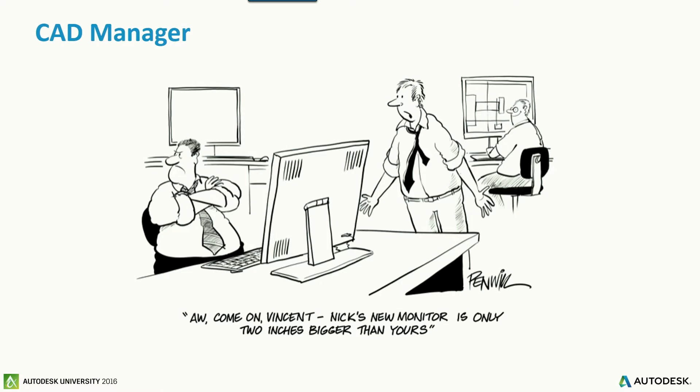So that being said, how many people in here are CAD managers? How many we got? I can't see too many. Well, not as many as I thought. So you CAD managers out there, Roger Penwill, if you ever read these cartoons of his, he gave me the rights to do this. The problem with this one is, I think I was Vincent in there complaining and not the CAD manager. So my second question, is this your dream job or was that your dream job? Oh boy, nobody said a word.

Wow. Well, anyway, most of the CAD managers that I know are engineers, scientists, technical specialists, people that have become very good and very passionate about what they do, that they're recognized by the company, and they say, you need to manage this process, because CAD management is a very difficult task. Not only do you need to manage the people, like in this slide up here, but this is not what this class is about. If you want to learn about the people part of the whole CAD managing process, Mark Kiker, Robert Green, look them up. They're very respected resources. That's where I've learned most of that part from.

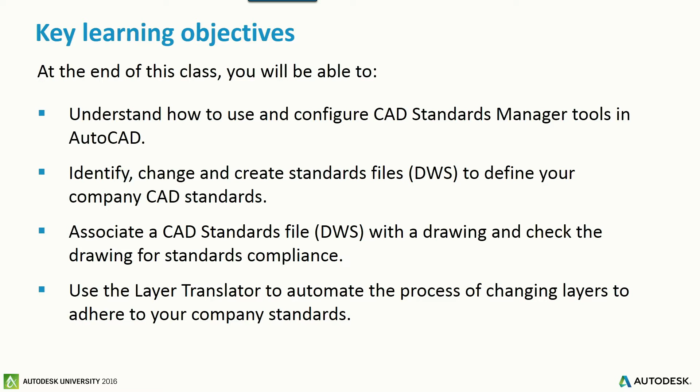And the reason I can say that is, all of these standard tools on here, my job is we audit my operators, right? We check their work periodically, quarterly. And they love it, you know. But I said, man, I can use this standards manager to save me the overhead time of checking the drawings.

And the only reason we do that, it's not to criticize, it's to give positive feedback to them so we can provide a uniform product and consistency. And I believe we're doing that. We all get busy at the end and things happen, but the tool you're going to see will enable us to do that. So the first thing, I'm going to flip over to AutoCAD. I'm going to show you where the CAD Standards Manager is on the ribbon, and then we're going to check out some of the tabs.

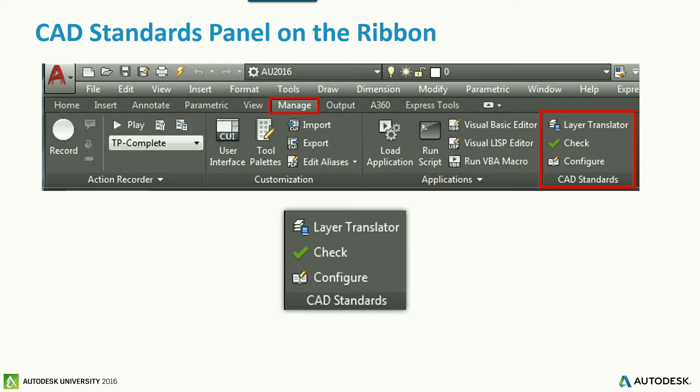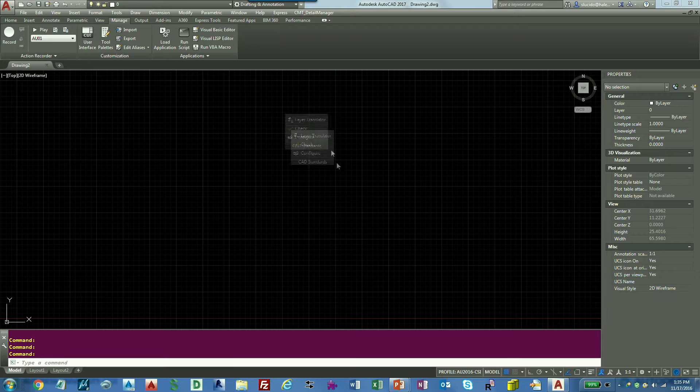So up here in AutoCAD, you see we have AutoCAD 2017, and I just have a CSI theme up here. So the Manage tab on the ribbon is located right here. What you see here is this panel on the ribbon. Not much there, huh? This has not changed. It's been around in AutoCAD for a while. It's just not used. If you're not familiar, I'm going to left click and just pull my panel out so you can see it.

What do we have here? We have the layer translator. If I select it, it has a box that tells you translate from, translate to. And we'll go through each of those individually. We have a check. Now this is going to come up and nothing's going to happen because I have not added a DWS file to this blank drawing. So I'm going to cancel.

And then here's where the configure part comes in. This is where we have these options. We don't have a whole lot to do. We have dimension styles, layers, line types, and text styles. Those are the things we can check. And basically, that's pretty much the fundamental root of what we're looking for. If those things are correct, you should be able to get a good output. So that being said, the first thing we're going to do,

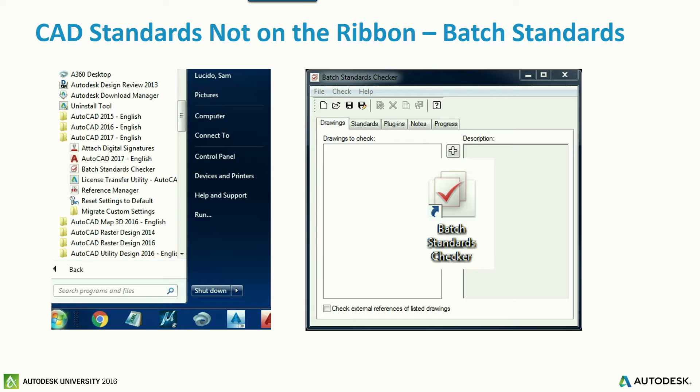CAD standards not on the ribbon. There's one more thing I wanted to cover in those 4 objectives in the beginning. There's something called the batch standards checker. We only have 60 minutes, but we're going to look at this because this one's pretty cool. This is not located on the ribbon. It's sort of like the reference manager. So if I go out to my desktop, you'll see I've loaded it here, and there it is. It's the batch standards checker, and you can load multiple files. And we'll go through this each time.

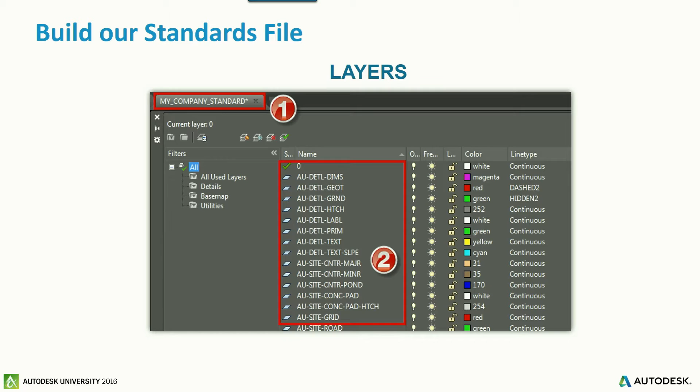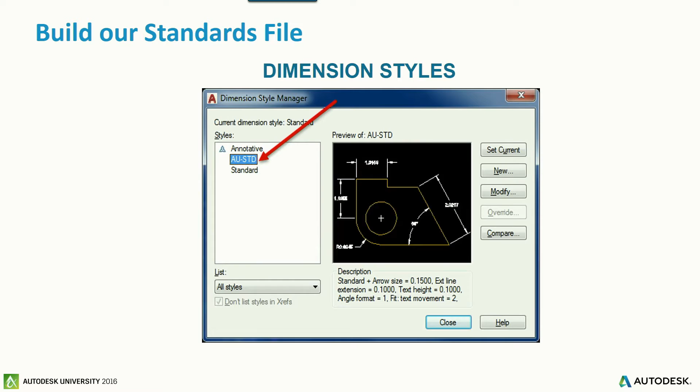So the first thing we're going to do is build different files. We're going to build one with layers, line types. You see I have some custom line types in there, so I want to check my drawing against these custom line types. Text styles, dimension styles. That's it. So the question you're probably asking is, why don't you just put them all in one file, Sam? Well, yes, you can do that. But for this exercise, we're going to do them separately and add them to one. The reason I wanted to go separate is because we can go one at a time.

And when I first started using the CAD Standards Manager, the main reason, it might be in one of the articles I wrote, was for text. I would get drawings that were converted from MicroStation or some other program, and it's like getting into your car when it's dirty. When you get into the drawing and you're zoomed into a spot, you don't even know where you're at, and then you look at the styles, and it shows 50 text styles that you don't know what they are.

So my goal was to use a program to merge the text styles. I used to use this text merge LISP file, and a couple other ones. And then I said, why can't I use the CAD Standards Manager? If I define my fonts or my company standard styles in a drawing, I can just fix them that way. So that's how it started, and then I started experimenting later with that.

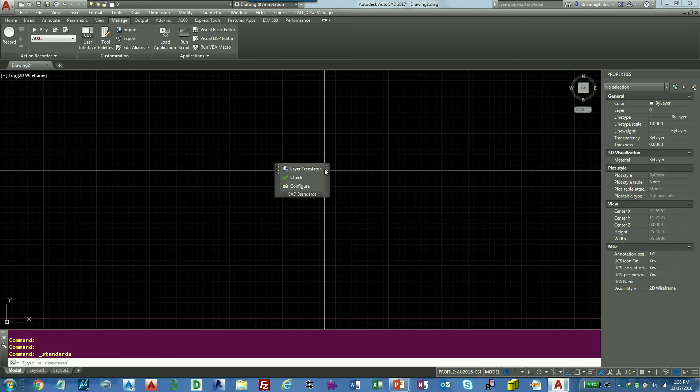So I'm going to flip over to AutoCAD, and the first thing we're going to do is create the standards file. I'm going to pull this back up on the ribbon, just like that. I'm going to my Home tab, and I'm going to open up a file called Standards. My Company Standards.

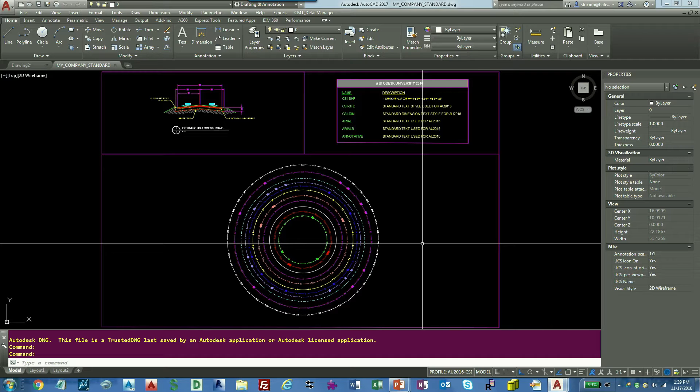So there's a file called My Company Standard. This would be if I wanted to take all of my text styles. I'll zoom in so you can see it a little bit better. So right over here, I have a detail with some dimensions.

If I type DDIM for dimension, I've got an AU standard for my dimension in there. These are all my standard font files if I type style - you can see these are all the fonts I'm using in the drawing. And then down here, line types - if I type LT for line type, I've got all these line types.

Okay, so that's cool. So next, what do I do with this? Well, I save it, obviously, but what do I save it to? So the first thing I'm going to do is save it to a DWG file like I did.

And then you have the option of saving it here to a DWS or a DWT. Now, the reason I wanted to cover the DWT - I save as a drawing file, then I go to the DWT, then I go to the DWS. It seems kind of one too many, right?

You can go right to the DWT, and the reason people use the DWT is if I actually go to save my drawing as a DWT. I'll do this one, file save as, and I'll just do a DWT and call it test.

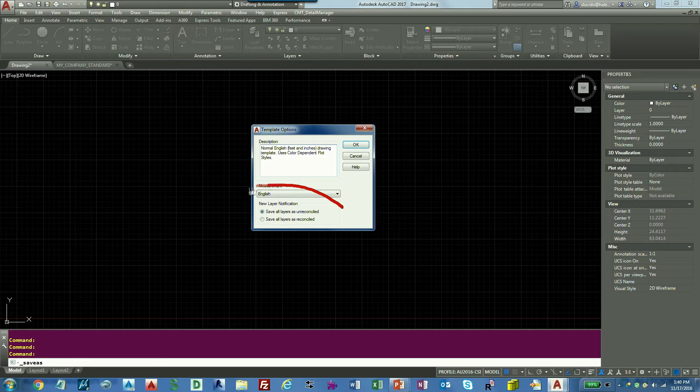You see what it gives me here? What it gives me is the option right here to save all the layers as reconciled. There's your advantage of your DWT.

And I'm sure all of you know - this is related to this, but not, it's a standard thing. So I'm going to cancel out of there and I'm just going to type my layer command. If you hit the gear over here on the left, there's a button here, new layer notification. If you don't turn that save, that reconcile layers thing, and you have this layer notification on, you're going to get a bunch of warnings all the time.

It's pretty annoying. Now, is that overkill? I don't know. We turn that off, so I don't worry too much about it, but I wanted to make sure you are aware that that's out there.

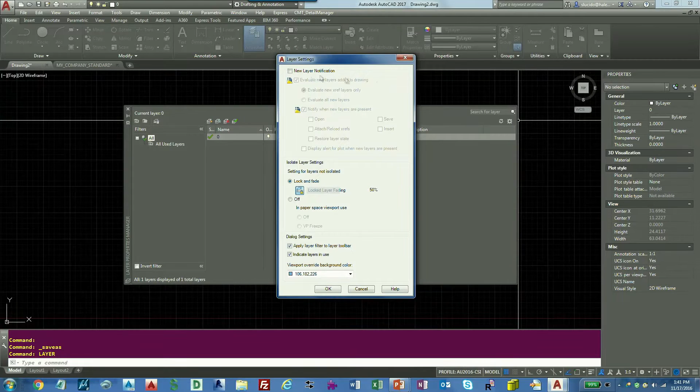So that's basically that. So I have my company standard. I saved it to DWT. I reconciled the layers, and then I saved it to a DWS file, which is right here.

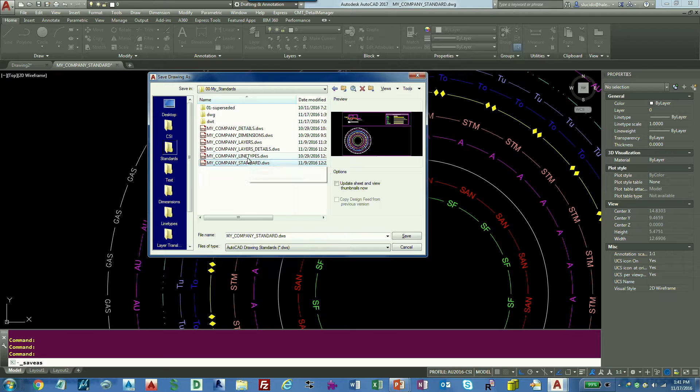And I'll go under standards, and you see what I did - I have my company standard right here. And then I have my company line types, my company layers, details, dimensions. I'll show you those files really quick, and then we'll do a check on text.

So the first one is, if I go into my standards files, the text is just contained in the company standard. So if I went into dimensions, I'll show you - you see how I changed, what I did was I changed the extension lines, the colors. I just made it a different dimension style so you could see what it does when it brings it in.

And a lot of you - I'm a civil guy, we don't use dimensions too much in what we do. Civil 3D takes care of a lot of that. But you architectural people and mechanical have many different dimension styles. This is where this can help you at.

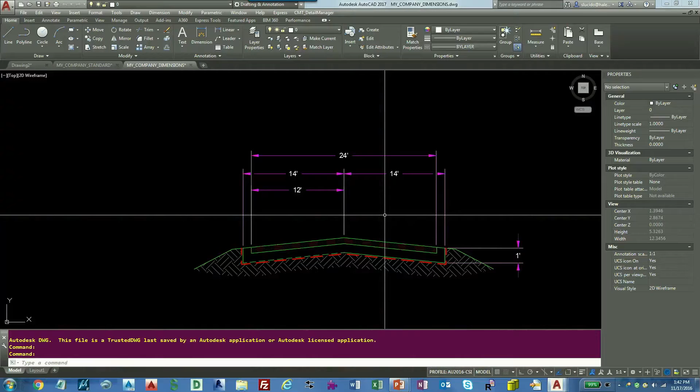So you take your dimension style, create it in any drawing - it can be in any drawing or it can be another one - and save it as the DWT or DWG and then the DWS. I'm going to open up another drawing to show you.

Line types you saw in the other one, but this is a separate one, line types, and I've got all my line types in there. You see this one is like two diamonds in it, where I love line types. If you followed me over the years, you can create a lot of different things with line types.

That uses the Wingdings font, and you just type in the letter that creates the diamond. So that's part of our standard. We use that, so I want to make sure we check against that on our drawings.

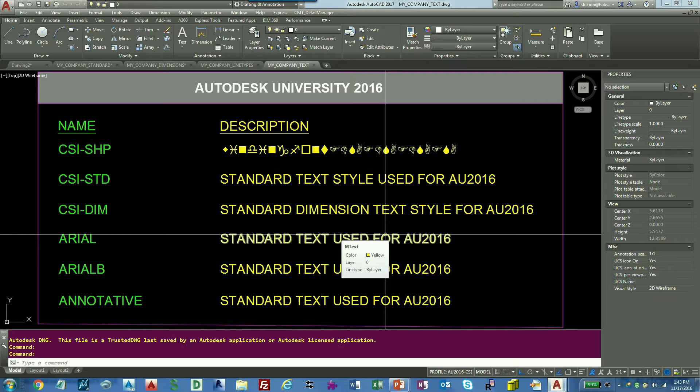I'm going to open up another drawing, the text one, and there's our standard text files. So basically what I did was I went through my layers, my line types, my text, and my dimension styles, everything I had in my company that I think was a standard, and I put them into files. Putting them separate helped me keep it organized, because a lot of times I would just want to check for it and it became cumbersome. But then again, putting them all in one place is a good thing too, so it's your preference.

I'm not going to save anything, and we'll see where we're at on my PowerPoint.

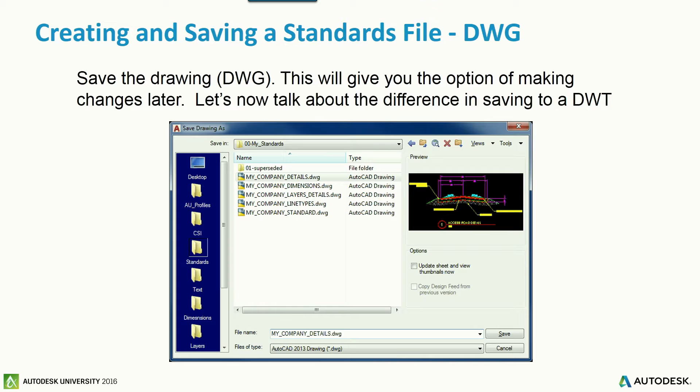Now my PowerPoint, just so you know, my good friend Matt Murphy always told me, years ago I did a class on line types and I made the best PowerPoint. I was so proud of it. But my PowerPoint's not for you, it's for me to keep track of my time. That's all it is. I'd rather show you live in the program how to do things. It has the images and everything we need, but it's there just to keep me on track. So we saved it to a DWG, and then I told you the difference between the DWT.

So just keep this in mind. I sort of still do the DWG and then the DWT and then the standard, just because I like the DWT since I can give it a description too and tell it version whatever.

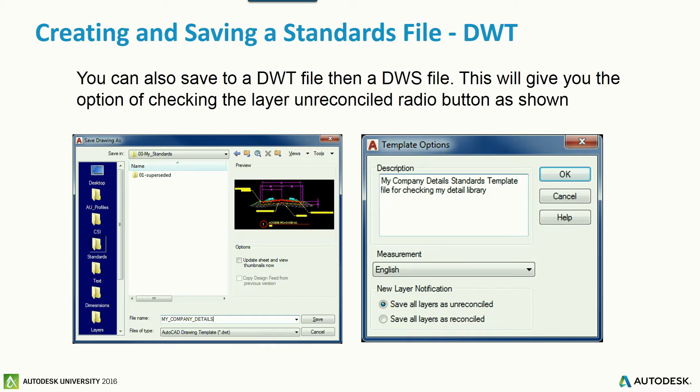So now that we've got all our CAD standards in place, we want to load up the drawing file into our thing. So we saved our DWS file. So now what we're going to do is I'll just briefly show you.

We're going to check a drawing for the text plugin. And like I said, this was the first thing I did, and when it worked, I was so happy to show people. And I said, you can do this, it's easy, this is simple, it's very simple to do. So we're going to do text files, add it into our drawing, and check a new one.

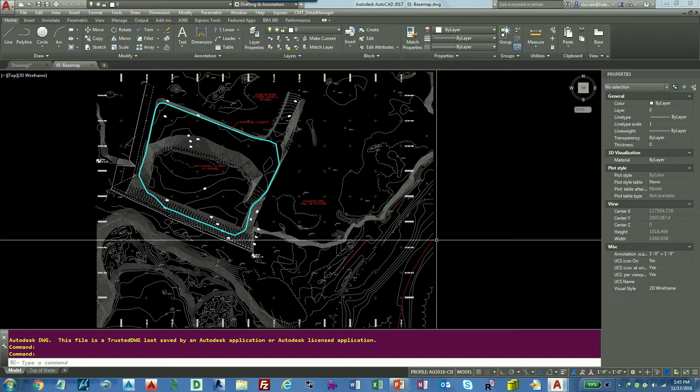So I'm back in AutoCAD. I received the base map from the client. Like I said, I'm a civil guy, but that doesn't really matter. Nifty site plan, topo, some text styles in there. I type style at the command prompt. And look at that: Arial, dim Arial, F1, standard, working, so on and so forth.

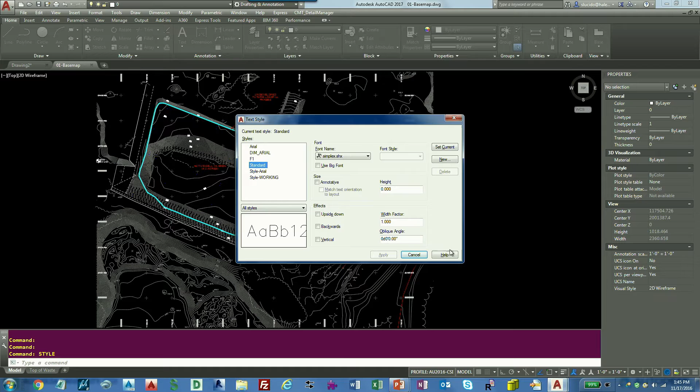Not what I want to see. Remember our standards were that CSI, SHP standard. We had them set in our other drawing. So how do we fix this quickly? We made that DWS file, my company standard.

I'm going to go over to the Manage tab on the ribbon again. I'm going to go to Configure. I'm going to add that DWS file, this one is my company standard. So I added it, do you see how it added it in there?

There's a settings button in here you have to look at as well, which will give you an alert once you add this in there if someone violates the standard or if the standard file is not found. So the settings can be checked there. I usually display an alert upon a violation, and over here you can set it to none or your company standard file. So I'm just going to hit OK.

Plugins, I'm only going to check for text styles. So I'm going to uncheck everything, and then I'm going to hit Check Standards.

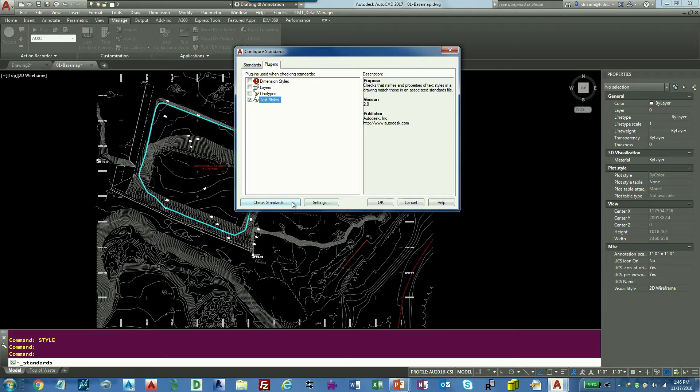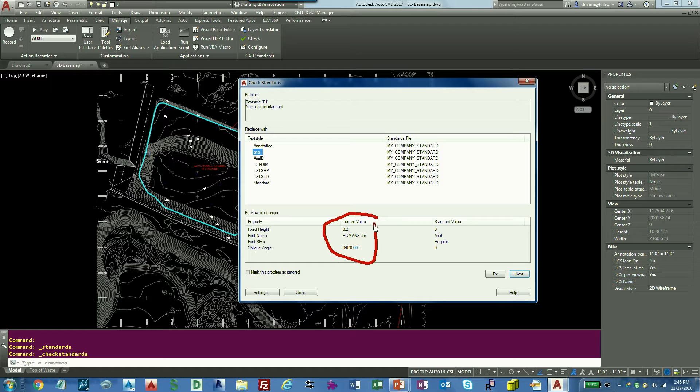And what AutoCAD's going to do, let me pull this up a little bit. You'll see it coming up there and it says, I've got this text style called F1, it's not part of what you're showing me down here, what do you want to change it to? And I said, okay, well, maybe I'll change it to Arial. And you see what happens is the standards manager is going to say, okay, the current value is a Romans 0.2 and your new value is a 0 height of Arial.

I'm just going to go through and fix it. The next one is Arial, I'm going to pick Fix. The next one is Style Working, Fix. You'll have to kind of look at the font and see what it is, see what it represents, because a lot of people don't really name all these, especially when you get them from somebody else.

Dimension Arial, we have a CSI dimension. We're going to fix it. And it says, I fixed 4 problems found, fixed automatically 0, fixed manually.

You can set this to fix everything automatically, but if you're anything like me, I want to see what I'm fixing. I just don't want it to go fix it and not tell me what's going on.

So I'm going to hit Close, Close. I'm going to type Style at the command prompt, and you see all that stuff's gone. Just like that, you cleaned up your text styles.

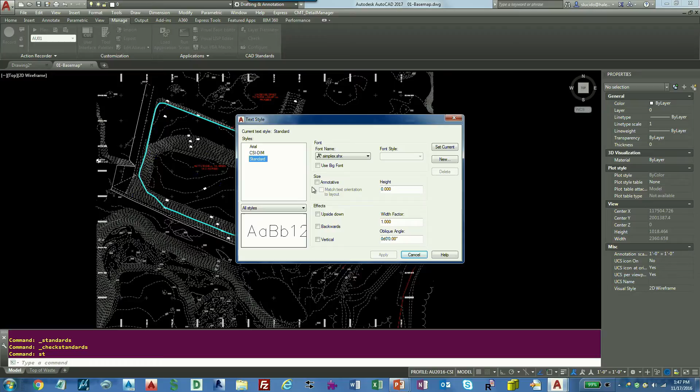That was, 2 minutes? So that's the text part of this. And like I said, it's pretty basic, but for me, I fought with that for years in drawings. I loaded up this merge file, and we had drawings that would come from DGN styles. We couldn't get rid of them. This gets rid of things.

So that takes care of text. I'm going to get out of my base map file, and I'm going to bring up my dimensions.

So we hired this young person, an intern, and we said we have 15 details to do for our library. Why don't you do these details all week? So he comes in, he does the details, and look at the dimensions. If you look at them, we've got tick marks, we've got italicized fonts, they're all red.

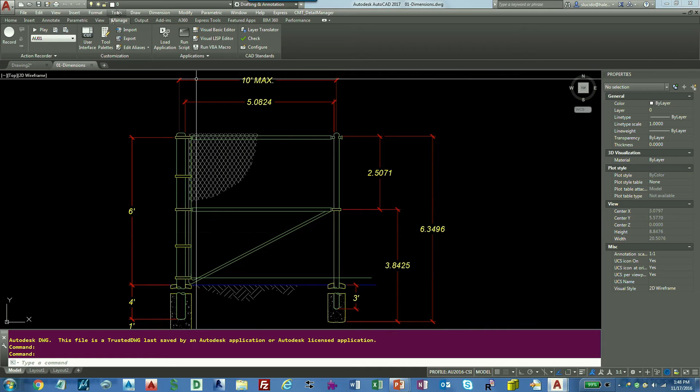Remember the dimension one I showed you? We'll go back and look at it again. If I go under my standards and under my drawing, I'll just bring it up. That's our standard dimension. Now it's probably not what you would do, but I wanted to make it visually representative. So that's what we saved our dimension style as, opposed to this. It's pretty different. So let me get out of there.

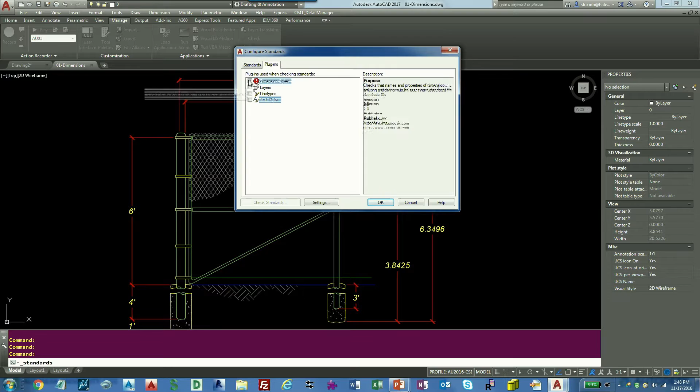Same concept. CAD Standard, the panel on the ribbon. I'm going to go to Configure. There's one in there, my company dimensions. I must have it in there. I don't want text styles, I want dimension styles. So I'm going to pull this over so you can see what's going on here. And I'm going to go to Check.

And it's going to say someone created a dimension style, and you CAD managers out there, this happens. My own standard, Jim's standard, Bob's standard, whatever. That happens a lot. People like to use their name. They're proud of it. So that's fine, but it's not our company standard. So I'm going to change that to AU standard.

And notice down below, these are all the values that are going to be changed in the CAD Standards Manager. One thing I want to point to, so we'll go into settings again. It's the same warnings again.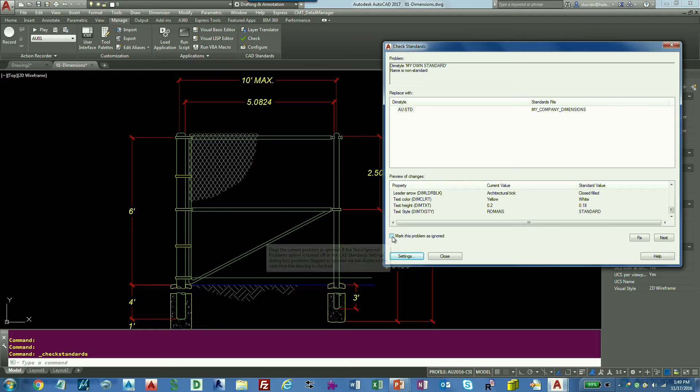Down here, there's a button that says Mark as Ignored. A lot of times you get drawings and files from clients that you have to do their way. The client trumps your standards, right? But in my world, it does. So that's when the CAD manager, whoever's doing that, you can mark it as ignored, and then when you run the check, it'll say ignored by S. Lucido, or whatever your login name is.

So let me go back here, and we're just going to say yeah, I want to fix that. And it's going to say one fixed automatically, and hit close. See what happened? It happened pretty quick, but that's pretty cool, isn't it? Everything changed on the fly like that.

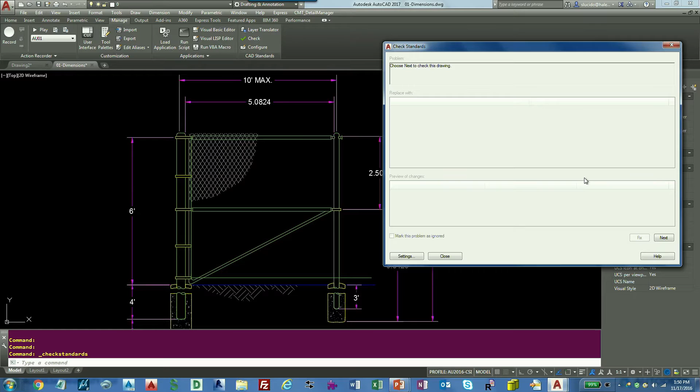So if you have multiple dimension styles, we fixed dimension styles and we fixed text styles. I'm going to close this, close my dimensions. I'm going to hit no.

So next up is line types.

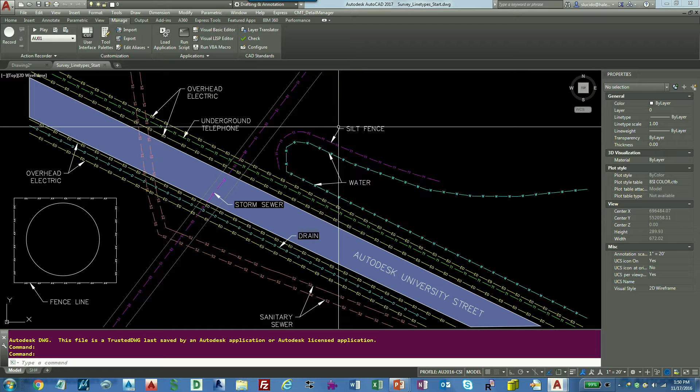Okay, so we had that standard line type file that we used, all these line types, and this is just a base map I created, just made it up. And I have all these different cool line types in there. But I noticed when I had the line type file, when I zoomed in, I said, man, my fence does not have 1x. It has 2 for the fence.

S2 is under my properties, you can see. It looks like it's a sanitary sewer. S1 is a storm sewer. And you remember our standards were SAN, STM, and the 1x for the fence.

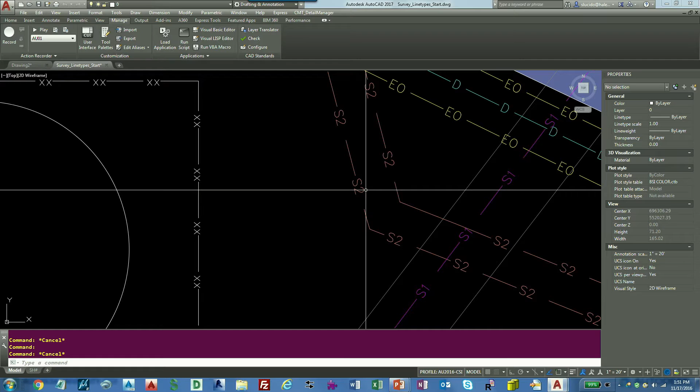So we can fix this the same, doing the same concept. We're going to configure the standards first, add the line types plugin, that one in there, and then check against the line types. I'm going to bring you up a quick one for this one.

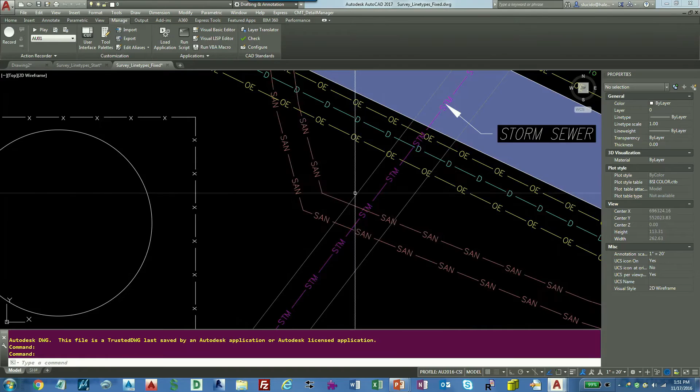I'm not actually going to go through each line type one by one and show you what it did. So after running the check, it changed my line types to sanitary, storm, drain, and water. So there's two fixed lines. So text, dimensions, line types. So what else? That's pretty much it, right?

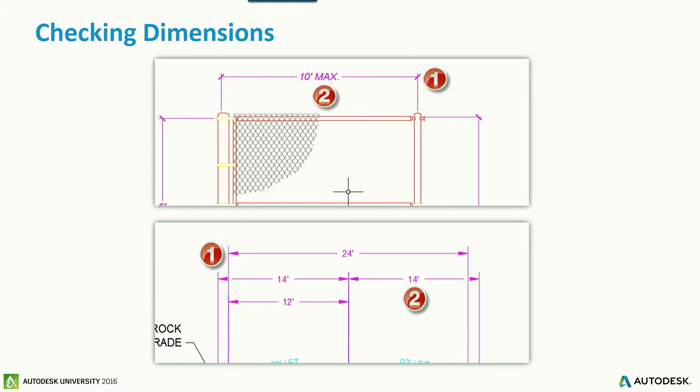Okay, let's go into the layer translator. Those are our basic things. There's layers in there too, but those are our basic concepts for this. So I'm going to go back out to the PowerPoint. We'll see where we're at. So we fixed our company dimensions. You see, those are the ones that were the wrong ones, and we just fixed them through there. We went back out. We did the same thing with this survey map for line types.

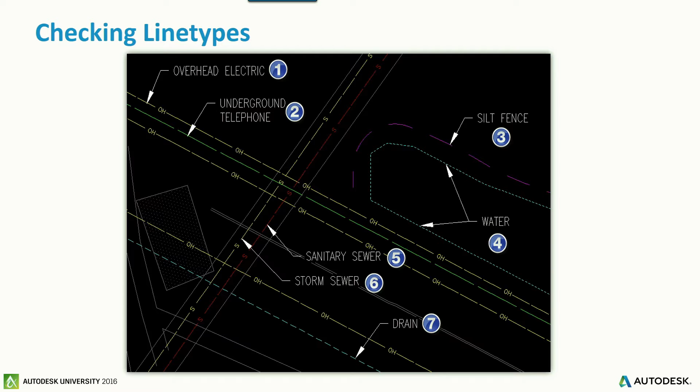And the reason I didn't go over line types too hard is because the layer translator can do that too. So you can save a step by going through there. But it's a good way to fix line types, especially DGN line types that come in there. It'll fix them and remove that SHX warning. So the layer translator. So what is the layer translator? This is a pretty cool program. Basically what you do is you bring up your drawing, that's the non-standard. You bring up the drawing that is your standard, and you map things.

So we're going to go back out to AutoCAD again. Let me get out of my line types. Layer translator. Our detail person created this detail from our library, and they put everything on these layers that really doesn't look too correct to me. So we know that a few things are off. So let's open up our detail, the one that was our standard. Now remember, I created a standard file called details. And the reason I did that is because detail standards sometimes are different than an actual overall drawing standard depending on where you work. So I wanted to show you.

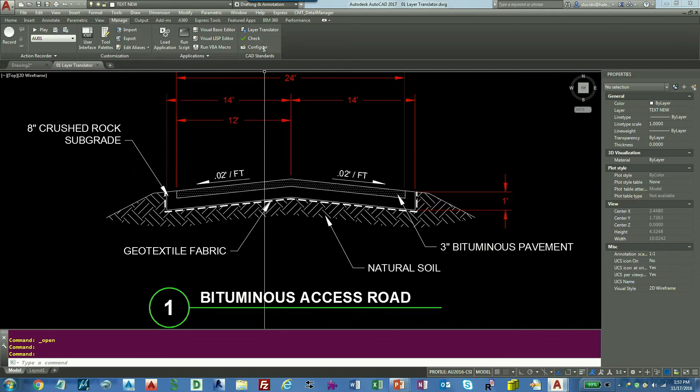So there's our access road, our standard access road, the way it's supposed to look. And here's the one the intern drew. So what are we going to do? Let's use the layer translator to fix that. I already saved this detail drawing as a DWS file, right? So I'm going to get out of there, and I'm going to say layer translator. So notice the first thing that happens is it comes up and it says, here's all the layers in your drawing. And if you get the little broom in here, that means you can purge it. Translate to what? Well, what do we want to translate to? Let's bring up my standard file.

Oh, it might show up when we do another exercise. I'll show you. If there's a little broom here next to it, you can right-click. The question was, what did I say about purging? If there's a little broom next to the layer, it means that it's not used in the current drawing. You can right-click and purge it there. Otherwise, it's going to remain in the drawing until you do purge it. So I'm going to load my standards file.

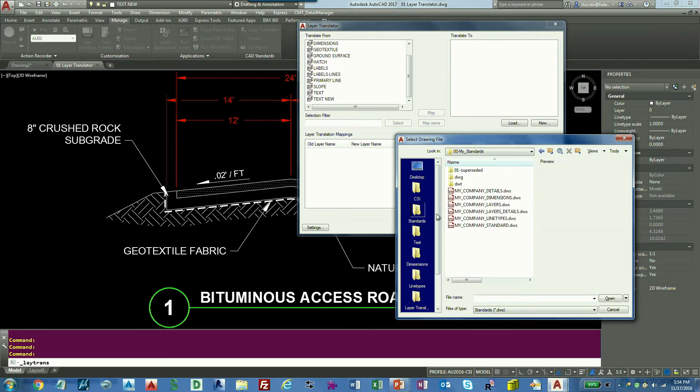Okay. So basically, this is how you do it. So the settings, I wanted to show you one thing on the settings. If you go down in here, this is where you have to set up the layer translator to actually translate what you want. Force the object color to by layer. Force the line type to by layer. Remember I told you about the line type thing? You can do it in here, so you don't necessarily have to go out and do it the other way. Force transparency and translate the objects in blocks. I don't typically write a transaction log. It's just a log file. And then the show layer contents when selected.

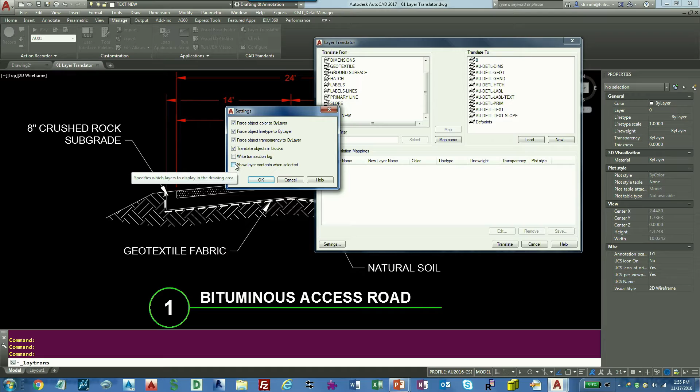So the reason I don't do that, everybody knows what the layer walk command is, right? How you walk through layers. If you check that button on, when I select map one to the other, it's going to kind of walk you through the layers one by one. If I don't check it like I'm doing now, I'm just going to map the layers. So I'm going to hit OK.

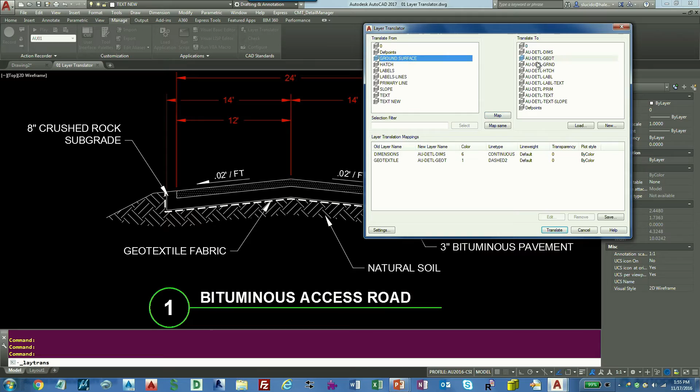So I'm going to just do this. All it does, I'm going to select dimensions on the left, and I'm going to select this on the right and hit map. And you'll see dimensions here, AU detail dimensions, continuous line type. Geotextile, I know that's on a geotextile, map. Ground surface, map. Hatch, map. Labels, map. Label lines.

It might have been that one. Primary line, map, slope, map, and then we have 2 text lines. I can actually hit my control key and hit text for both of them if I wanted to. Map, and def points, obviously, we can map it anyway just to get it to 0. Map. Okay. So I've mapped everything. Now what do I do?

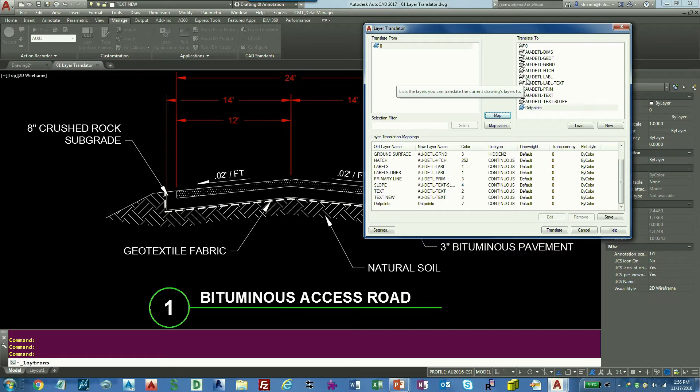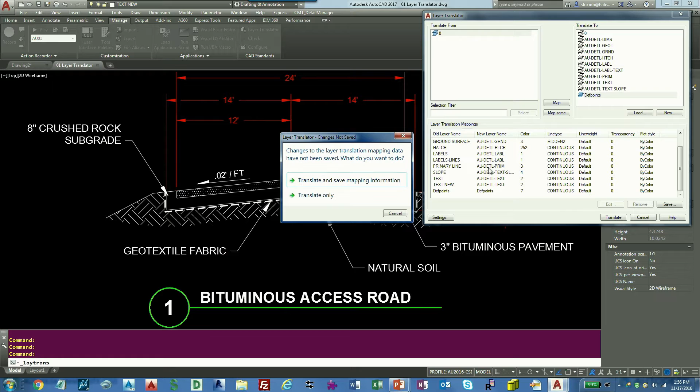I translate it. So watch my detail when this happens. Remember what the other one looked like. Translate. Okay. It says, do you want to save the mapping file? In this instance, I don't. And I'll show you in the next exercise how we're going to save the mapping file. The reason being is the layers that were on this detail probably won't be on another one, so there's no reason for me to actually save a file to redo the layer translator. So I'm going to translate only.

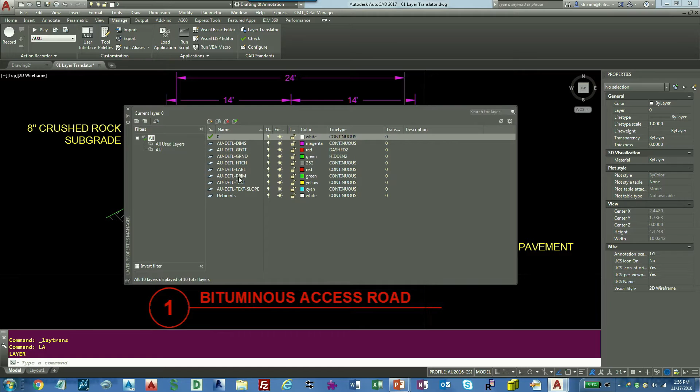See what happened? There's our detail right there. Everything translated to what we wanted in our drawing. It looks exactly the way we want it. The line types are hidden. The geotextile's there. The layers are good. So that's the layer translate. That's a pretty basic example of how to use that, but I encourage you to take a look at it. Now, the next example I'm going to show you is what I believe is the key to using this.

So I'm going to get out of my translator, and I'm going to go back to my PowerPoint and see where we're at. So we went through the layer translator, and we went through the settings. Remember, we said force object. Just remember that last one is sort of like a layer walk. I didn't really do that. Your group has to be disciplined enough that everything's drawn by layer, which is challenging at times, because if it's not drawn by layer, this is not going to work. And then we translated the drawing. So now I want to show you, remember what came up and said, do you want to save the mapping file? This is where the key comes into this.

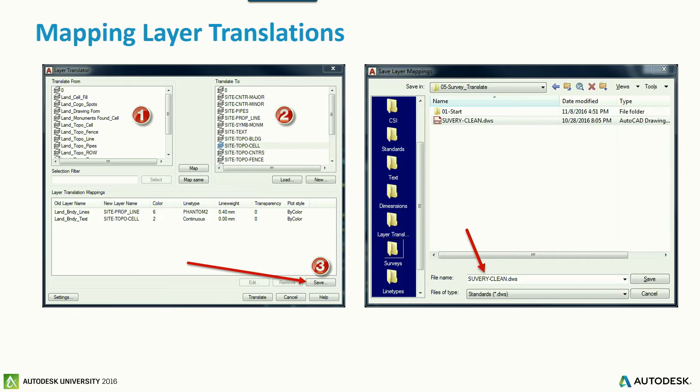So I have a contractor. So I'm going to bring up a drawing. So I have a contractor that we use, and he does, see, ignore SHX fonts. He does property surveys for us. Great guy. We love the guy, right? But his surveys come in and they're not very good. But cost effective, friend of somebody, we like them. We use them all the time. We use the same surveyor to do drawings for all these properties in certain areas. The same surveyor gives us his same layer settings every single time. So this is where the key comes into mapping.

So what I did was, I said, okay, I got my first drawing from this surveyor. They're going to send us 10 more. Or the same surveyor is going to send us updates to the base map every 3 months. Those are the cases you use it. So now I'm going to actually configure this. I'm going to add a drawing in here. I have to test it in here, use the layer translator, and then map the settings. Actually, I'm going to cancel out of there. I'm going to go back in here and configure again. Layer translator. I'm going to load the drawing file back in my layer translator, my surveys.

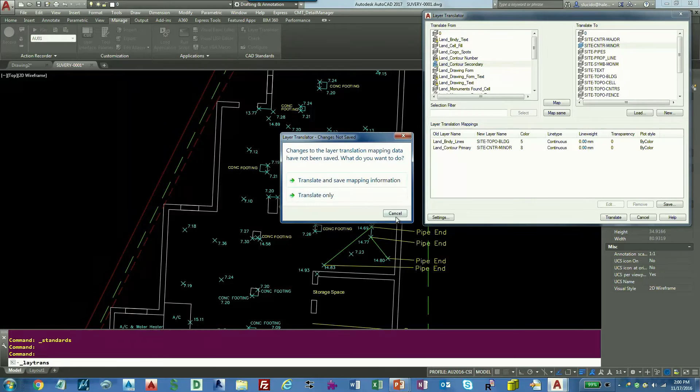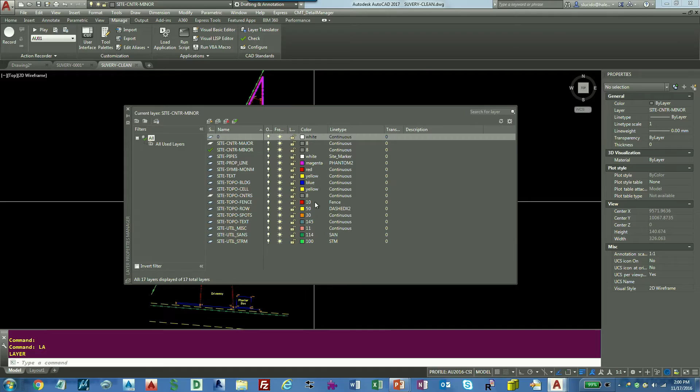I'm just going to show you what the layers are in these. So here's the survey. Here's what his layers are. They start with land, and then the one we cleaned up starts with site topo, and it changes a few line types. Okay, so we think we're ahead of the game, right? This one I actually used on projects. It actually works. So I saved my mapping file and I called it survey clean. So I took that, saved it to a DWS file. So we've got this guy, he just sent us another drawing. He sent us 2 more. So we're going to open up the second one.

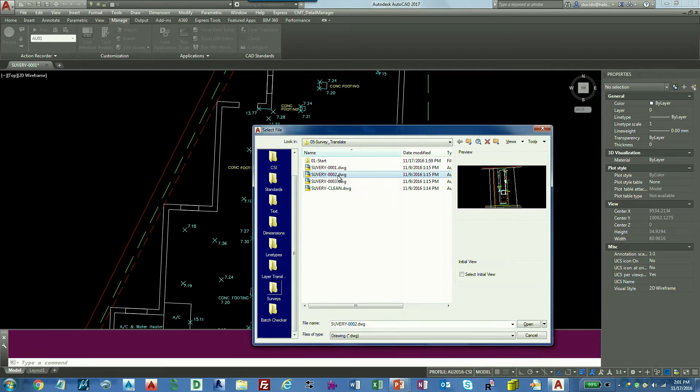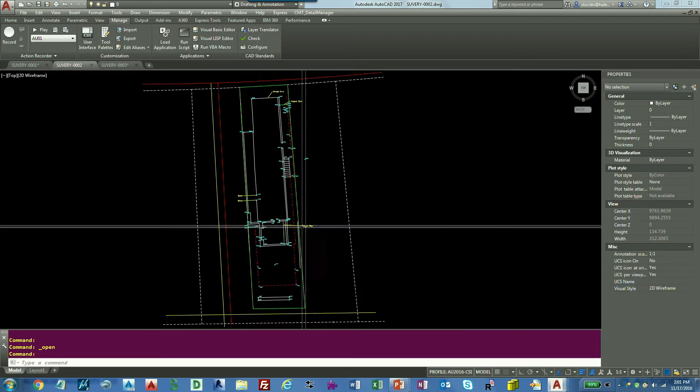I'm going to ignore the SHX, it's probably a line type. And then I'm going to open up the third one. So if you look at them, and like I said, if you look at the layers and do the layer walk command, you can see we've got a couple different land, topo, fence. Layers are pretty similar, right? Kind of looks the same. So we know we mapped that file.

So now what we want to do is take these 3 drawings and convert them. So how many people, when you get a survey, and I manage a lot of CAD people, I've done this for years, it's going to take me 4 to 8 hours to clean that up. It happens, right? It happens. Clean it up, make it look good to your standards, make sure it plots.

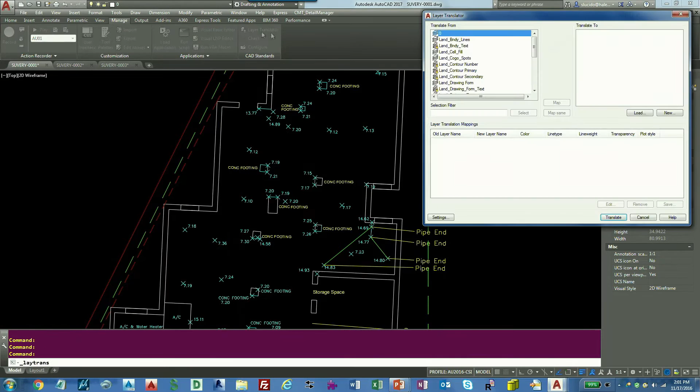So I'm going to go into here. I'm going to go to the layer translator. And I'm going to load the settings here. I'm going to go to DWS. So I saved it to survey clean, right? Okay, I'm going to do 1, 2, 3. Open. See what happened? Everything from my left side went to the right side because it's the same surveyor with the same layer translating. And I mapped it to that DWS file.

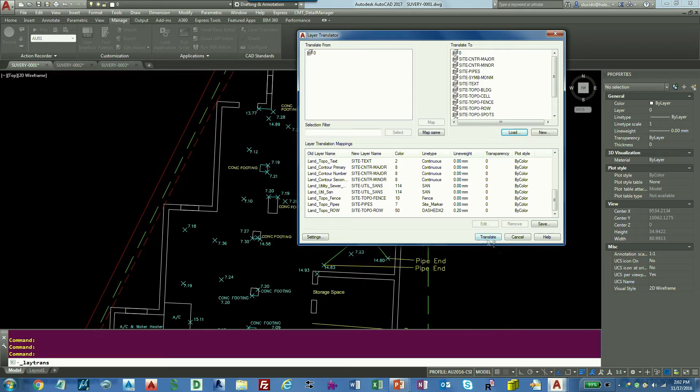I'm going to hit translate, watch my file. I'm not going to save the mapping file again, translate. Look at my file. That's number 1. Survey number 2, layer translator, load, survey clean, translate only, looks pretty good. Survey 3, layer translator, load, survey clean, translate only.

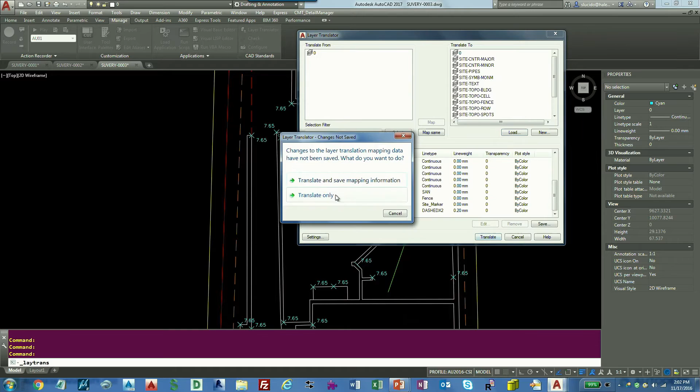This is when my good friend Michael Beal goes like this and does touchdown. Isn't that cool? I mean, you can really think about what you can do with that. I took 3 drawings that came from somebody that uses the same layer scheme. In a perfect world, you give them your layer scheme and they send it back to you, but that doesn't happen. At least it doesn't happen with me.

But if you use the same surveyor on projects, which a lot of times isn't up to you, it's up to the project manager or the client, you set up these files and you can translate. It works well for me when we get base map updates for surveys for land development projects. And then we can create these mapping files. You just keep it in a folder called standards and you're good to go.

Man, you guys weren't as excited about that as me. That was my...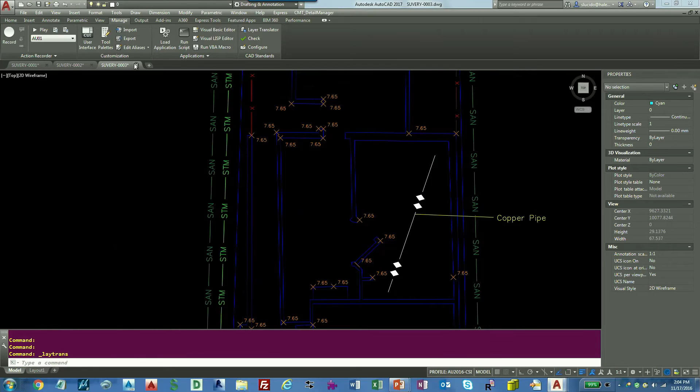Yeah. Anyway, let's go out and see where we're at on the PowerPoint. So mapping the layer translation. So that does that. Making a new layer. I threw this in there because I wanted to say if you do have a standards file connected to your drawing and somebody tries to make a new layer, you're going to get a warning that says, hey, you can't do that. Or do you want to have it on something in there? So if I actually opened up a drawing, I'll get out of my translates. I'm going to open up one called layers.

So I have a standard file attached to this. Say it's my company standards. And the plugins are set to layers. And it's attached to this drawing, and I saved it as test. Okay, and if I go to layer, if I try to make a new layer, see what it says? It says it's not part of it. I can choose a layer that's existing on there.

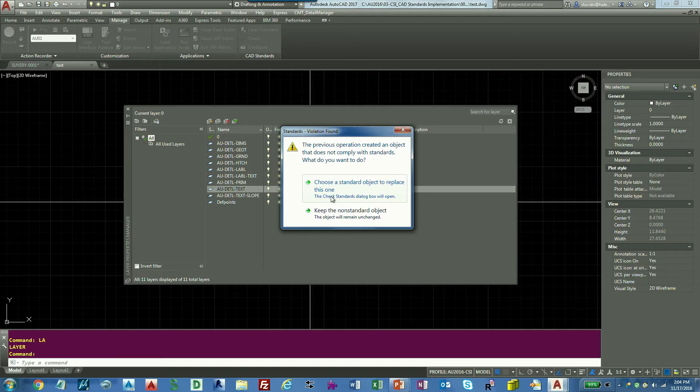This would be if you had layer settings where you had every single layer in your company all set. You could set it to this file, attach that CAD standards to that file, and then the operator would know, hey, look, you can't do that. I always wanted it to do, though, like a wildcard, to kind of reference, so if your layers were prefaced by something. But that's what I mean by layer in there. And that's controlled by adding the plugin to it. And I can tell you honestly, a lot of times when I configure these, so I've got that set there, when I get done, I remove it.

And this is at the end of the PowerPoint because there's a system variable called standards violation. And if you set it to 2, what I noticed, I have about 12 to 15 core users. They know what that means. But I also have 80 other users that when they get the little bubble that pops up on the lower right that says standards file missing, they think there's something wrong with the file. There's nothing wrong with the file. It's just that you checked it against some DWS file that's not located on their system.

So it's called standards violation. It's either 1 or 0. If you set it to 0, it'll turn that notification off. Even if that file's not in there and it doesn't see it, they won't get a warning. So we made a new layer.

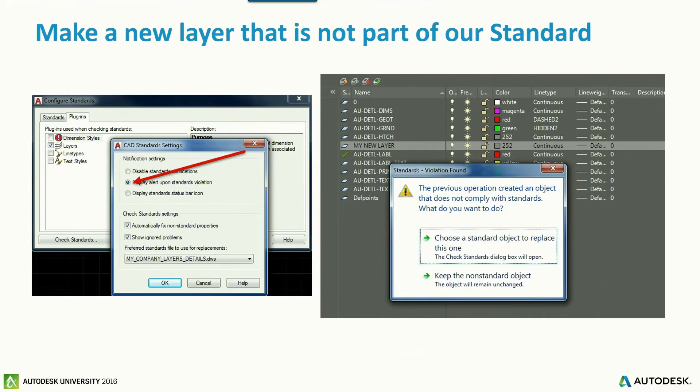Batch standards checker. So back to details again. So like I said, I audit drawings for my team, and we have a detail library. So when people get light on work, I'll give somebody a pool of erosion control, a pool of road access, and they'll do a bunch of drawings. So how do you check them? So this little tool is located outside of AutoCAD. And these are the icons that are showing up there. In the first one, new, open, save, save as, start, check, stop, and so on and so forth. And I'll show you how to do that.

So I'm actually not in AutoCAD. I'm going to actually go out to my desktop. Let's just get out of AutoCAD completely. So we don't actually have to be in the program to use this standards checker. And if you want to know where it's located, you see I have the reference manager here. If I double click it, there's a reference manager. And if I double click the batch standards checker, the batch standards checker comes up there as well. So both of them are located under Start, under Programs, under Autodesk, AutoCAD 2017, Batch Standards Checker, Reference Manager.

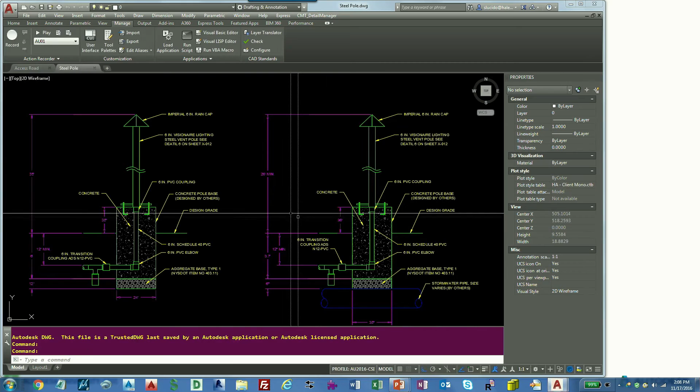So what the Batch Standards Checker does is, I'm going to open up AutoCAD just to show you real quick the details we have. Like I said, we build a detail library. So I have 3 details in there. One's an access road, one's a temporary turnaround, and one's a steel pole. And they have to be done to our company standards. So we've got everybody on the same page. Access road, and I could open them all at once. You see, that one looks pretty good. That was the one we've been using. Steel pole, may or may not be right. And then temporary turnaround. So those are our drawings.

So my guy came back to me and said, Sam, I finished all 3 for you. I'm good to go. And I said, okay. So normally I would open up AutoCAD and start checking things. But now what I do is I created a DWS file for details, specifically for that, because line types are different for details sometimes, because sometimes the lines need a bit lighter weight. So I'm going to get out of the drawings, leave AutoCAD open. Now for some reason this is going to come up on my PowerPoint, so I'm going to go to a blank slide. I'm going to leave it right there.

So if I go back out to the desktop, Batch Standards Checker. And you'll notice the buttons, this actually works pretty good because Control-Shift-A will do new. You see there's new there. I don't know why they made these buttons so small, but they are. So I've got all these buttons in here. So I want to do a new one. I want to open. I want to add drawings to it. So the first thing I want to do, I want to add those 3 drawings. Access road, steel pole, temporary turnaround. So I added them to my Batch Standards Checker, right?

What do I want to check this against? Do I want to check it against a standards file that I already have attached to each of those, or do I want to check it against one that I don't have attached? Well, normally I don't attach standards files, so I'm going to attach one that we created. So I'm going to check that for the drawings there, and I'm going to attach one called My Company Details.

The question is, why do I not attach the standard file to the original drawings? Because the operators, if you know what, you could just check it against that file if you want your operator to actually run that standards check. Most of the time, I don't even tell them about it. They should know the standards. So when I get it, I just check it. But certainly you can. And then you won't have to attach anything, you just have to run a check.

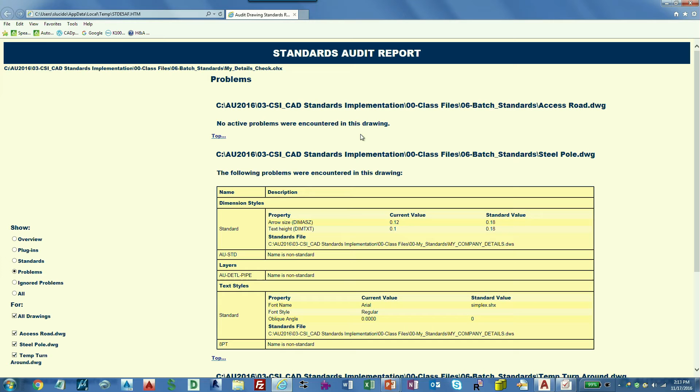So this is what you get. It brings up your browser with the overview of the report. Here are your 3 drawings: my temporary turnaround, my access road, and my steel pole. The access road we worked on earlier had no problems. The temporary turnaround only has 4. The steel pole has 5. I can go over on the left and select the standards I checked it against. You'll have to remember to zoom down. And I just want to see the problems. No active problems were encountered in the first one, and this one had the following problems.

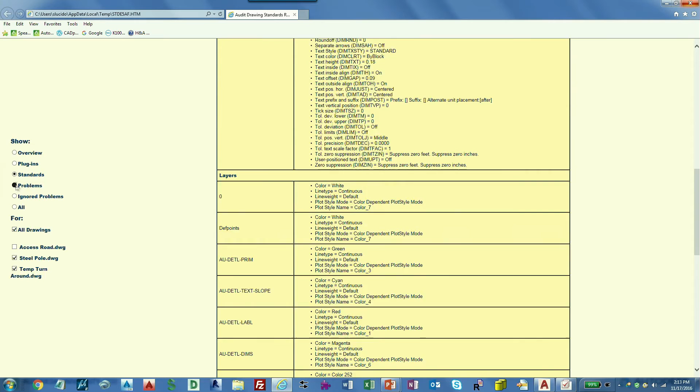So you can get out of here and you're done. Or, since the access road is good, you just turn that one off and go back to problems, and now you're only displaying the problems for the 2, or you can send them one at a time. I'm going to get out of my browser, and you'll see it says you can view the report and export the report. I'm going to export the report, throw it on my desktop and call it My Details Check. You see it's an HTML file? So basically you save it,

hit close. I'm going to go out to my desktop, and double click My Details. I can send that to my operator and say, hey, look, you got a couple things to clean up. For me, as a CAD manager trying to ensure consistency in my deliverable, this is a big time saver. Then they can go, oh yeah, I missed a font, or we have something in here that's wrong.

Sometimes it seems like we get too harped on the standards and how picky we get, but you have to keep your drawings organized, and everybody has to be on the same page. They just have to be accountable for their work and know that you're checking it. For me as a manager, this saves me a ton of time. I send them the HTML file, they look at it, they send it back, we run another check. Now I can open that check file again. They send me back the details, I go back to the batch standards checker, run it again, and open the check file.

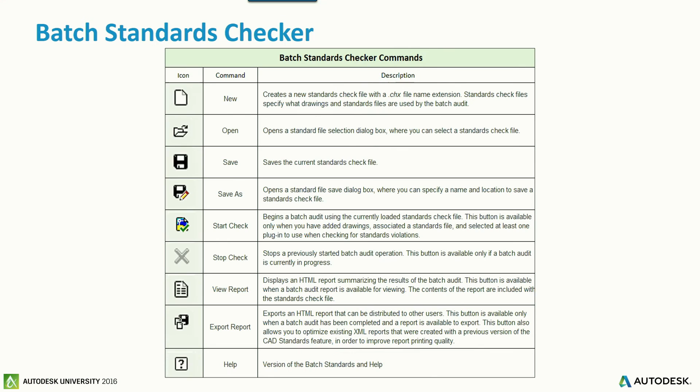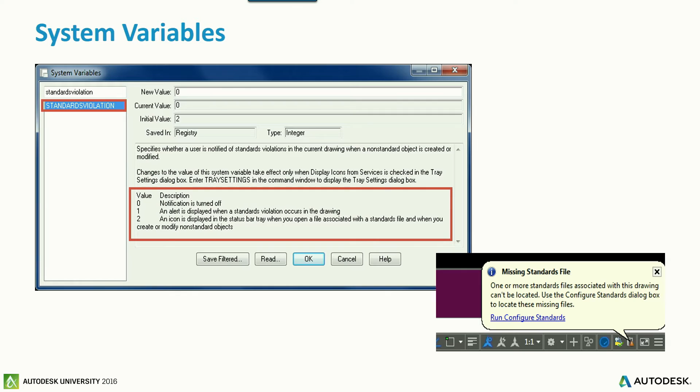So I'm going to go back out to PowerPoint. So you got your standards audit report. We ran our batch standards checker, and you can see up here we had a few problems, and the problems were fixed. I told you about the standards violation system variable - that's what I meant about the Run Configure Standards. It'll get the missing standards file. And even though it does nothing, people will get nervous and think there's something wrong with the drawing file. So by hitting the 0 on that, you can turn it off.

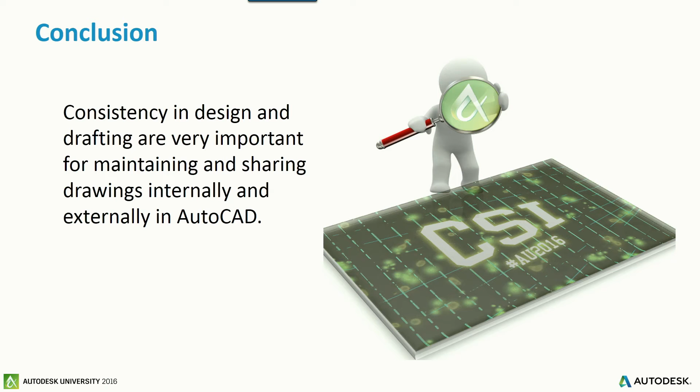So in conclusion, I did go a little faster than I wanted to, but I think it's pretty basic - we can go over different topics and talk about more of it. But I left this up here and changed it at the end because consistency in design and drafting are very important for maintaining and sharing drawings internally and externally in AutoCAD. What's in your house, make it, own it, keep it good, and then when you send it out, do the same thing.

You want to make sure you provide consistency in your output. It's like if you get something and it doesn't look all right, you start thinking there might be something else wrong with it. But if you can use this tool, which has been around for a very, very long time, to help you with the layer translator mappings, the batch standards, the text files - it's one of those tools where even if you just use it for text, you've done your thing. I've tried a lot of different programs to convert line types, text styles, dimension styles, and this thing works.

It works. So what I'm going to do is load up some drawings on the data set, like my standard, the line type one with the standards and stuff, and some standard files that you can check against. They're not up there now, but I'll do that tonight, so you can take a look at that and play with it.

For this, we always do the surveys. I'm stuck on the survey thing, I think, right? Anyway, the surveys are - it's just like me talking about the CAD standards, right? So I have to give feedback to people. And I used to take it hard too back in the day. I used to be like, come on, I don't go too fast, come on, I'm doing it. But now I kind of encourage it because it helps me slow down, keep pace, and cover the topic needed without losing everybody.

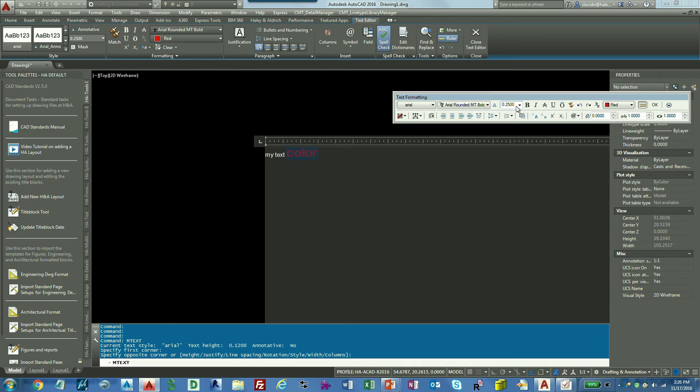Yeah, and then they'll change the actual text to a different font, and let's make it big. How's that? Yep, that's exactly what they do. That's some creative CAD work you got going on there.

All right, let's see if we can do it then. We'll do it together - we're gonna configure it and change it to the text I did. I actually had one in here for my company. We're on AutoCAD 2016 now, so I'm gonna go to my company standard, hit open, go to my plugin, go to text styles. Let's move this out of the way. So let's see, how many people think it's gonna work? That is a low number.

All right, check standards. It says, what style did I use? Wait a minute, let me get out of here - I'm going to see what I used first. So my style is called - we'll make it a different style, we'll call it new, and we'll call it test. And we'll set it to current. Close, put this over here. This style is test.

Okay, now I'm going to configure my standards - plugins, text, check, okay, style line types. Next, next, next, next - there's test. We're going to change it to Arial. The magic question. Fix - problems, 5 fixed automatically. Close. Didn't do it.